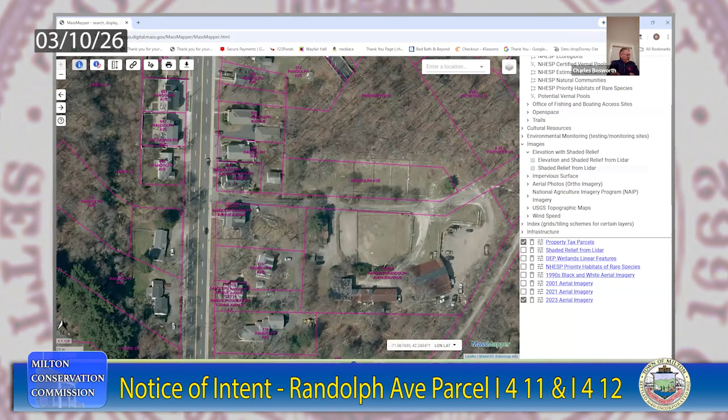I think that elevation change down at Randolph Ave is down around 114, 115. And the driveway entrance is at 136 at the proposed home. So you have a significant elevation change. You are correct, it does pitch down to Randolph Ave, as does that entire parcel of property on that hill.

Cognizant of that and the questions and feedback we got at the last meeting, what we're trying to control is any new runoff coming down from the site development down that road to avoid that situation, and just trying to mitigate and control it on site.

I guess if you look particularly at the house site, you could say we're not working on the right of way, and it's true, you're not doing much work on the right of way, so I agree with you. You're minimizing the runoff from the building site. On the other hand, I think there might be an issue existing. Just wondering about that.

I won't say it's the greatest current condition, but maybe that's a conversation to be had with inspectional services, that would be under their purview. It's the private owners who own it though, right? There's several private owners who own it.

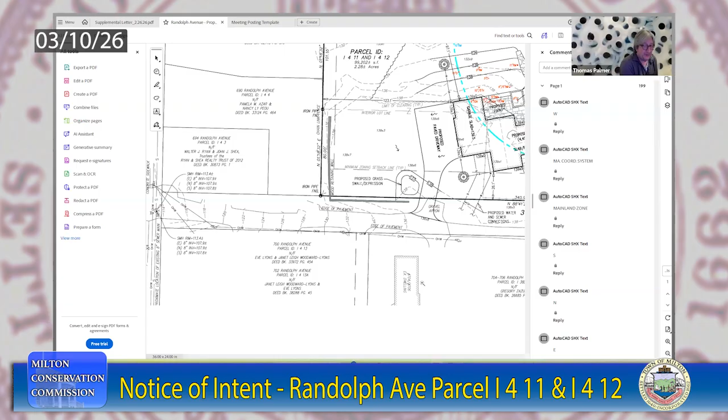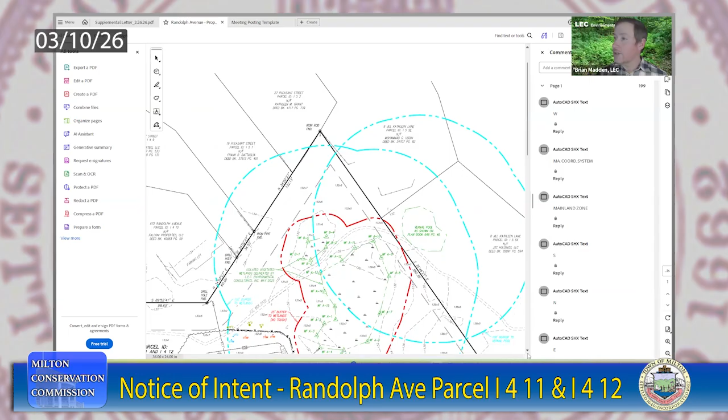I don't really have another question about the wetlands, except as far as this path you're talking about, is there any fill that makes this path happen? Did somebody make a path by heaving up dirt, or does it just naturally separate two parts of the wetlands? Hard to tell, we'd have to go back quite a while to figure out. With the amount of quarry out here that we talked about at the first meeting, and rock, some of it's natural, but a lot of it has been placed at some time in the past. There could have been old roads through this area. What's out there right now has been there for a long, long period of time.

The homeowner, to my knowledge, doesn't have any need or use of that path, so we'd be willing to take steps to abandon it in place. You can see this development footprint nibbles into it, so it would be effectively cut off as a cut-through path. But if the commission would like some measures to help close that off, we can certainly do it at the two trailheads.

I don't really have any opinion on that. I just had an academic question about how it got there.

Hey, can I take you back for a minute? Can you go back to the one that shows the driveway entrance? Because one of the things you said, well, let me back up.

In February, I was concerned that the Randolph Avenue drain has sufficient capacity to accept additional water coming from this site. The reason for my concern was because we approved a change order for the project across the street at 711 Randolph Avenue, where they tied into that, and so they were increasing the volume of water coming off of that site and going into the town drain.

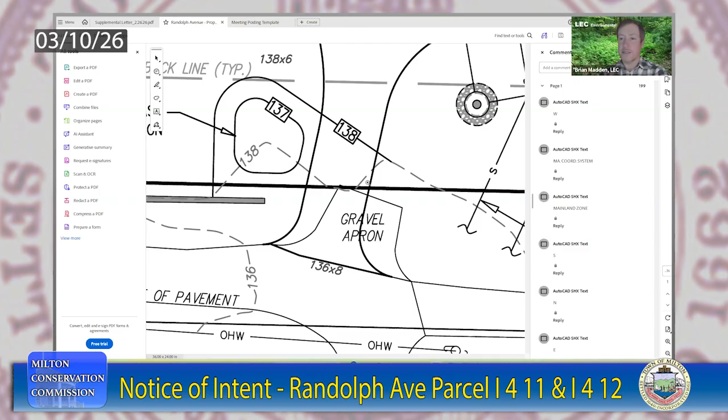I would just add that I'm liking this blow up, it really makes it possible for us to see this well. And it does occur to me there is new paving in the right of way that's not there now, so there's a certain amount of addition of new impervious to the right of way. And I would like that all tilted back toward this depression or rain garden we're talking about. I don't know if that's possible to do. Charlie was saying, no, we're stuck with the existing elevations. If that's the case, then it's hard to argue with the fact that the project will add a small amount, but a certain amount of impervious to the right of way.

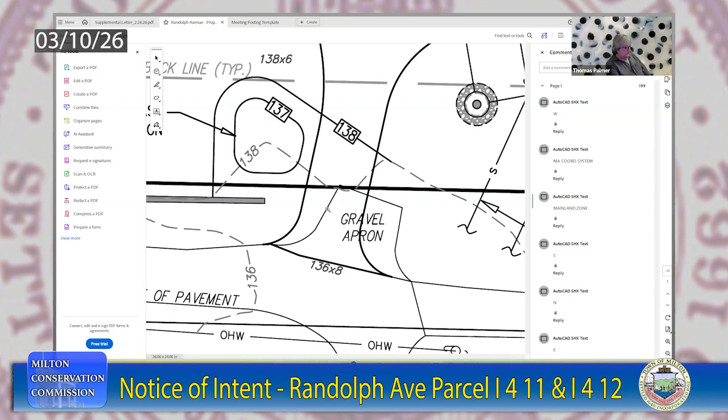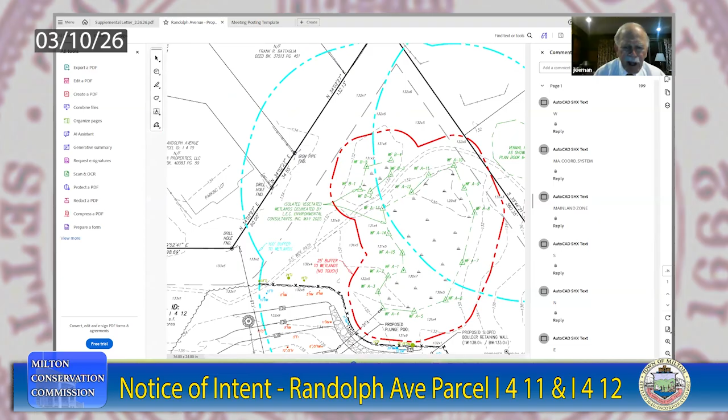Well, we've been talking about some pretty cost-effective alternative potentials here. So it's at least, in my view, doable. So I encourage you to think about that, discuss that further with the owner, and this might be a very simple solution. Yeah, no, certainly appreciate the feedback, and we'll review it in more detail and talk it through with the owner, see what else can be incorporated there.

Really appreciate it. And a beautiful solution too. Don't forget that, John. You are a rain garden enthusiast. I love them. I know you do. I know you do. I want to see it on the plan.

Makes me so happy. Are there other commissioners with comments or questions? Any? I don't see any, and I don't hear any. Are there abutters or members of the public that have a question or would like to make a comment?

Again, I don't hear any objections. And apropos of Tom's suggestion that we do a site visit, which I support, by the way, I also would like to have a site visit. It's a pretty sensitive area. We've got a certified vernal pool in the area, so I appreciate the applicant's sensitivity to that. I think they've addressed that on the plans.

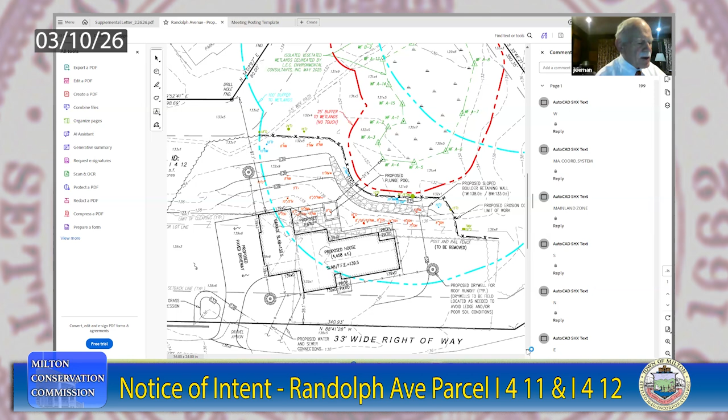But is it possible for the commission to meet on a Saturday morning at 8:30 in the next 2 weeks? I'm looking at Saturdays and I see the 14th, which is this Saturday. But for the public, we need 48 hours of notice before we have a public meeting. And for the applicant's benefit, this is a public meeting and we can vote at it, so this is not interposed for delay in any sense. We've got the 14th, the 21st, and the 28th. Let me just put it out to the commission. Can anybody do it this Saturday on the 14th?

Could I, sorry Mr. Chairman, before you poll the commission, I'm just... I know today put a pretty good dent in the snow melt. I don't know the current conditions out there right now. I certainly don't want to duplicate a site visit. I mean, how are conditions looking out in town with the snow?

Well, a lot better as of today. But you make a good point. We had a site visit for a pedestrian bridge under review, and we were supposed to meet Friday the 6th, and we canceled it. So our rain date, if that's the right word, is the 28th. Actually the 27th, we're meeting on a Friday for that site. But for that exact reason, we didn't want any snow.

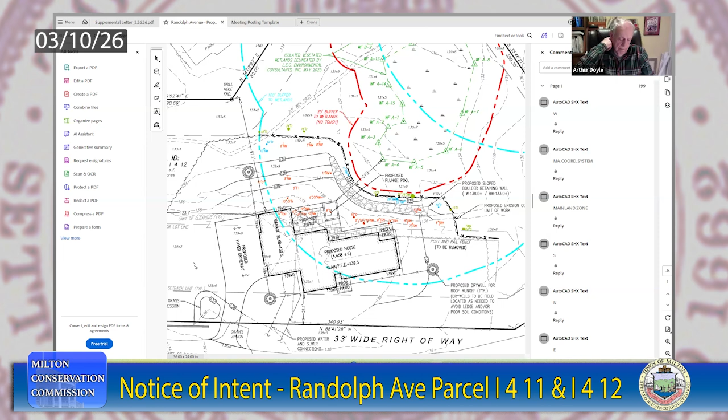Yeah, that works for us. Okay, commission members, so we're okay, is there consensus there on the 28th? Yes, works for me. All right, so we'll continue this with the assent of the applicant to the 28th at 8:30 on site.

Is there enough room if we go up the access road, can we park there, or should we go up the other access road? No, there's plenty of parking. Once you go up the right of way, you'll just go a little bit further down, and there's more parking areas right next to the paddock.

Okay, all right, so that's on for the 28th, and that's a public meeting. Philip, if you can just make sure that we get the publication out, and that way we can take a vote on that day. No problem, I'll take care of it. All right, perfect, good news. Anything else on this one, or can we move on?

Is this the same road that goes up to where the old jump is? No, it's not. It's right next to it, but it's not the same road. Yeah, right after it, going north, back to St. Elizabeth's. Oh, okay, all right. It's not a road with a street sign or anything, it looks like a driveway.

Okay, so what's my landmark, what's the best landmark? There's a sign at the bottom that says Pleasant Street, indicating Pleasant Street's coming up. If you turn right there, a yellow sign, that's the road. Okay, yeah, it's in between 702 and 690... 694. Yeah. Yep.

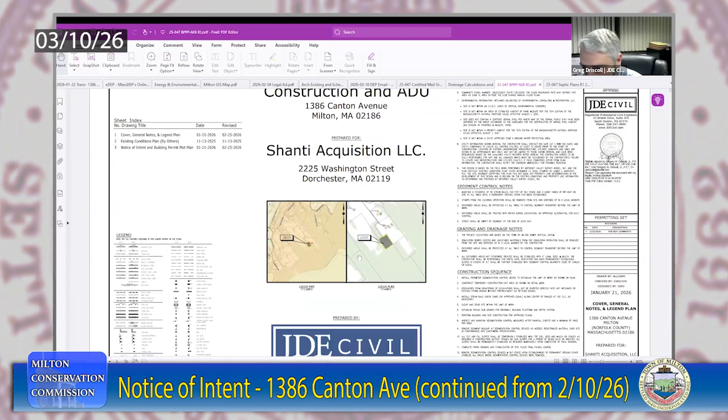So the project applicant, Solomon Chowdhury of Shanti Acquisition LLC, is looking to obtain the land permits to build a new home on their property at 1386 Canton Avenue. Just to start off real quick, I'll get us oriented here with the location. So here's Canton Avenue right here. This is that long right of way that comes down with several houses off of it to the property towards the back. I have another.

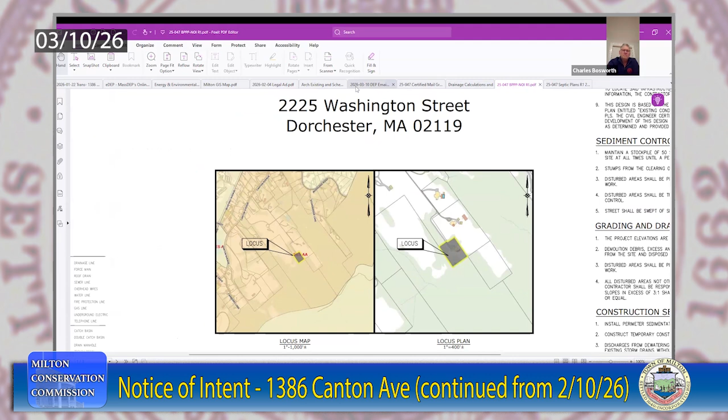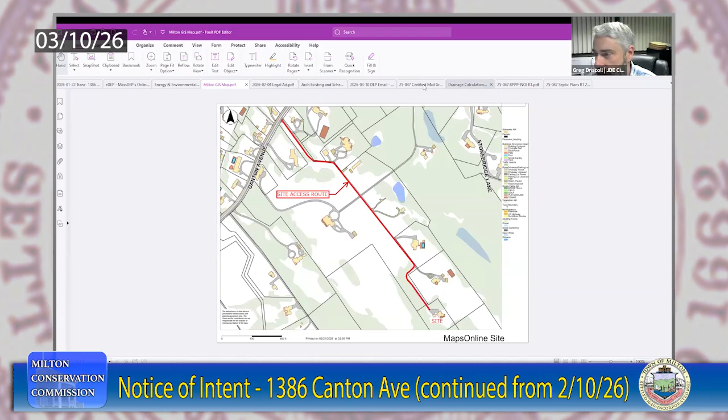You come in right next to the Suffolk Resolves House? Yeah, I think so. Yes, and here's a quick little sketch I did. It's the last property at the end, right? You kind of bump right into it. Yes, absolutely, that's it. All right.

I'll get into this - this is the existing conditions plan right here showing the right of way coming out to the property. This is the existing house on the property, currently a two-story home. Not sure how many bedrooms off the top of my head, but I'll discuss that when we talk about the proposed. This existing garage is going to come off, and the house is going to become an ADU. So this existing house is shown to be demolished, a new house to be built in this location, and the existing house will be converted to an ADU.

So the applicant would like to - and as we have a flagged wetland, Bordering Vegetated Wetland, on the edge of the property to the west - we're within the buffer zones to the BVW. So we're before you tonight for a notice of intent application for the construction of this property, for this house.

And this is going to be a proposed 4-bedroom single-family home. The existing dwelling will be converted to an ADU. We are proposing to reutilize the existing water well here. We're building a new septic system to accommodate both structures towards the back of the property. The septic leach field itself is outside the 100-foot buffer; the tanks, however, are within it.

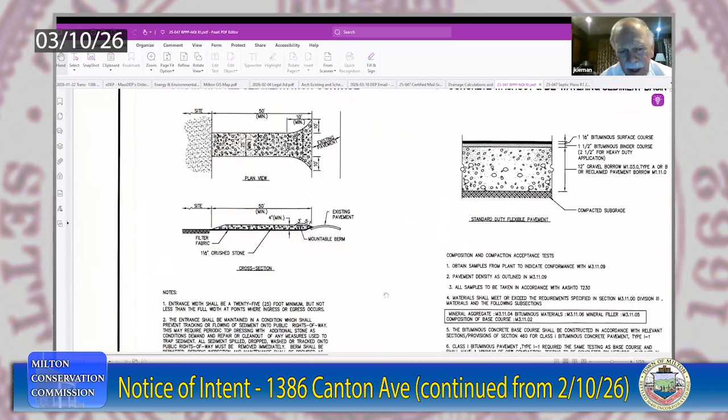I don't remember this, but what you just said about the stabilized construction entrance, what is that? Just a 3-inch gravel or 2-inch gravel, or something? Right, the reason I bring it up, we just had a meeting last week on another large site project, and the construction trucks will go in and out right onto a fairly heavily trafficked roadway. So it made a difference.

But one of the issues that came up was, and I'm not suggesting that there's any knotweed in this area, but we do take a pretty good look to see if there's any invasive species around, and I'm talking about knotweed right now. We just wanted to make sure that construction entrance and the stabilized entrance for the trucks is sufficient, that if there is mud in the trucks, whether they're concrete or road graders or whatever you're using, that they're cleaned, and that the importance of that goes up to us. If there's an invasive species, we don't want the trucks tracking that around. So I'm just asking you about what's the size and configuration of that stabilized truck entrance.

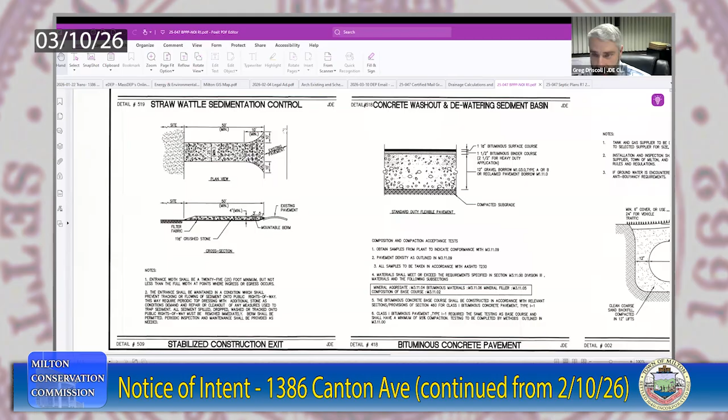But I'm just curious as to whether or not you've got, because on the other site they do have an invasive species, Japanese knotweed problem, and we just wanted to make sure the truck cleaning works. Yeah, I did the test pits on the site with the Board of Health, and I didn't notice any knotweed when I was out there. I think there was some. We were on what, 1362 or 1365. I thought there was some Japanese knotweed right by the corner of the house. So we've been up in the area, not at 1386, but we were at, I forget whether it's 1362 or 1365, and there was some knotweed around there.

All right, and another thing I wanted to mention is the septic plans are at the Board of Health. They had comments, we just addressed those and submitted back to them. They're under review right now. And we have this same note on that plan to make sure that the septic contractor knows that the work is within jurisdiction of conservation, and make sure that they have a copy of it and they know what to do of the order conditions once that's issued.

Yeah, that's pretty helpful to us because it depends on who the contractor is, but it does help us if they're informed and given notice that they have to be careful.

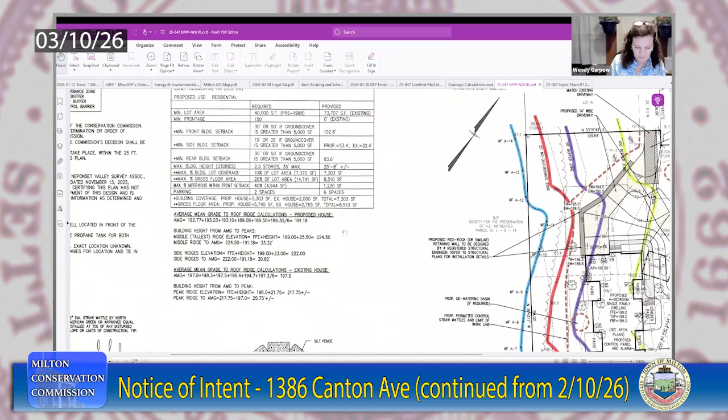So the proposed house is 5,745 square feet. The existing house is 2,765, for a total of 8,510 square feet. Could you repeat those numbers? Sure, they're right here on the screen. Proposed house, 5,745 square feet. The existing house, 2,765, for a total of 8,510 square feet between the two.

Can you explain to me how the existing house square footage meets the standards for square footage of an ADU, and building coverage?

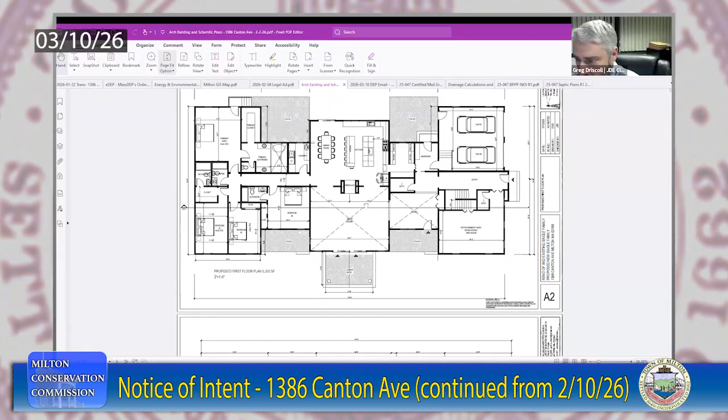Yeah, that's more for the architect. He did send me the plans though. They have common areas within the existing house setting, the areas that we covered to common areas that won't be included as residential areas. So they're calling this main house space, like common area for the main house. And then the gray shading is the ADU. So they're using portions of the house for a gym and an office as related to the main house, which is the new house.

What's the ADU limit, Wendy? Is it like 900 feet? It's pretty small, yeah, I believe it's under 1,000 square feet. Yeah, I just don't see how this meets that criteria. Yeah, it's 900 square feet.

And frankly, I'm the engineer, that's for the architect and the building department to work out as well. But this is how they've approached it. And I believe these are two separate conversations, two separate houses, correct? Yep, two separate structures. But you're claiming that more than half of the existing structure is going to be considered common space? Yeah, or main house space is what he's calling it on this plan.

Has this been before the planning board? No.

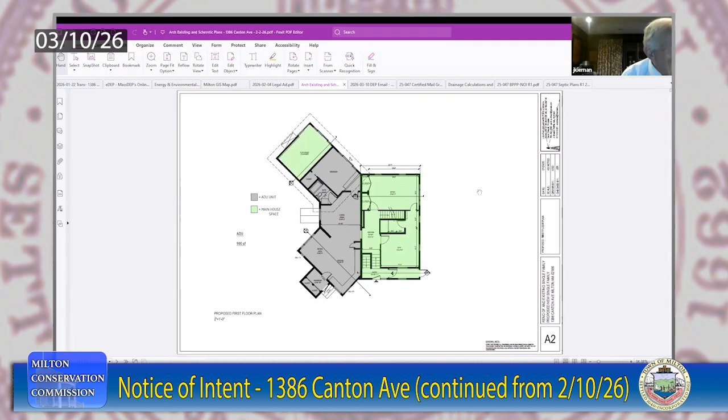Well, that's a big house. And I confess, I haven't looked at the runoff calcs. That's a lot of impervious space. Do you have calculations as to roof runoff and where it's going? It shouldn't be an issue, but all you have to do is add Cultec chambers if you've got too much water. Yeah, I didn't see where this is a single family home, and even if they would still consider single family under for stormwater, I didn't see any.

So for the state, we're exempt from stormwater, and that's where I would have filled out the NOI form. And I didn't see anything in the local regulations requiring us to do anything for stormwater or roof drains.

Well, we're interested in the runoff. Where's the water go? It's usually not a big deal as long as you've got some mechanism to. Okay, but is there a local regulation that requires that? Because I didn't see anything in my review of the bylaws. Well, not specifically designated as a stormwater reg, but just our overall review of where's the water go?

I mean, we're just still using net increase flows across the property into the wetland. West to east? Yes, I'm sorry, east to west. That's certainly within the purview of our bylaw. I mean, if you're putting more water into the wetlands, we want to know how much and what's the flow rate. That doesn't have to be a specific component of the town bylaw, but rather the impact. What impact does the alteration have upon the resource area that we protect?

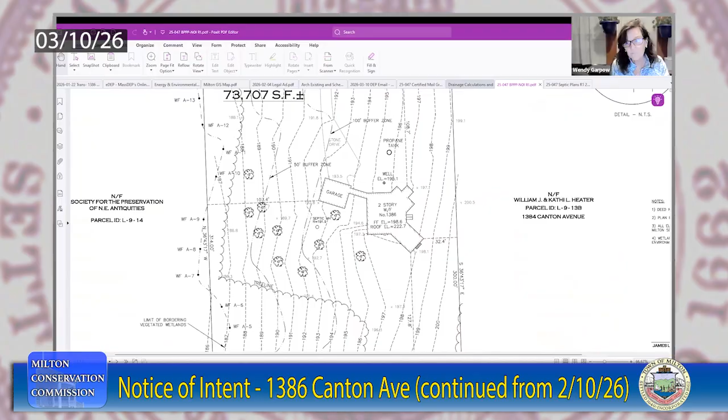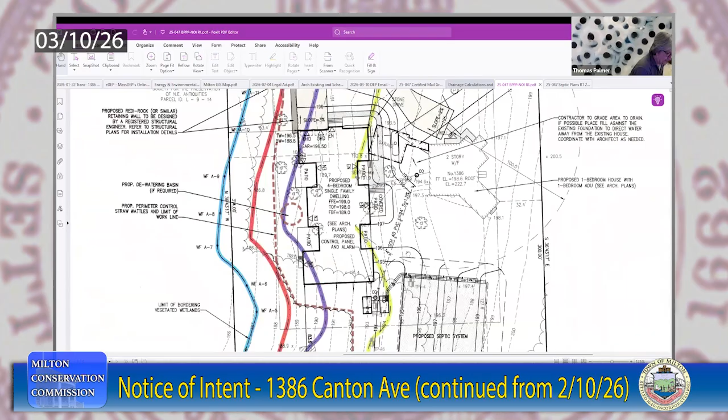Go ahead, Tom. I'm looking at the existing condition plan, and I notice it shows a tree line, and then a group of individual trees between that line and the existing house, maybe about a dozen. Then as I go to the other plan, it seems like they're all still there, but some are covered by the house. Those are supposed to be screened back so you see the existing condition and the proposed overlaid on top, with darker outlines. So there's some trees that will obviously be lost to the house, but there are others between the construction as drawn and the wetland, generally in the buffer. My question is, what are those trees, and are you keeping them or not?

That's a good question. Like this one right here, we could keep - that looks pretty wide open. I don't know which one you mean. This one right here. Do you know what that is? What kind of tree? I don't know off the top of my head, but I assume they're sort of semi-big because they get their own little symbol.

Well, I guess we can ask again at the site visit, but from our point of view, the more trees in the buffer zone the better. Yeah, we tried to keep as much as we could for this area where we're kind of pulling back to get this corner of the house in and the upgraded septic system in.

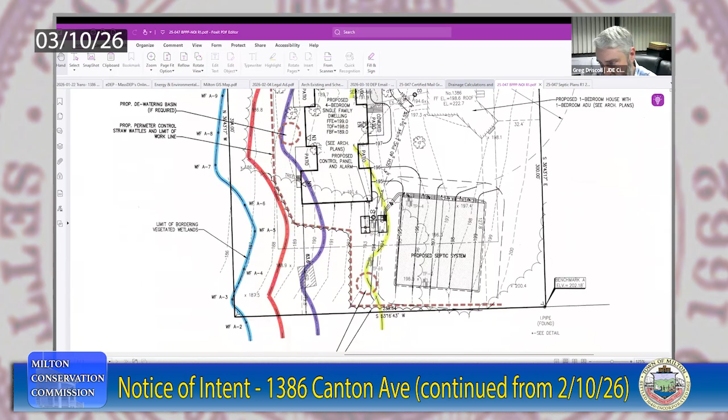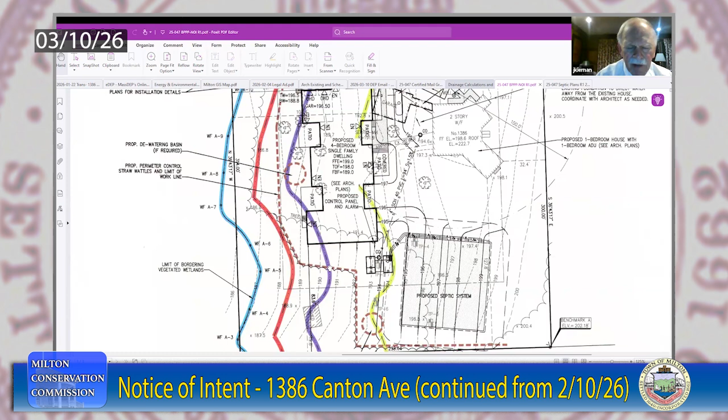We do have a tree replacement policy, so we'd need a tree survey as to what's coming down, because it has to be replaced in kind. We used to have a 3-to-1 replacement, but the last 10 years we've had a matching either DBH or circumference at breast height - so if you take out 100 circumference inches, you have to replace 100 inches. If you can do it on site, we encourage that, and this is a large site, so you probably can. But if you can't, we have an inventory where you can either put the trees in inventory or pay - we're now at $700 per tree, measured at I think 3 inches caliper for $700. So we need a tree survey to know what's coming down and what the replacement plan would be.

But only within the 100-foot buffer, right, John? Yes, that's correct. All right, any other questions from commissioners?

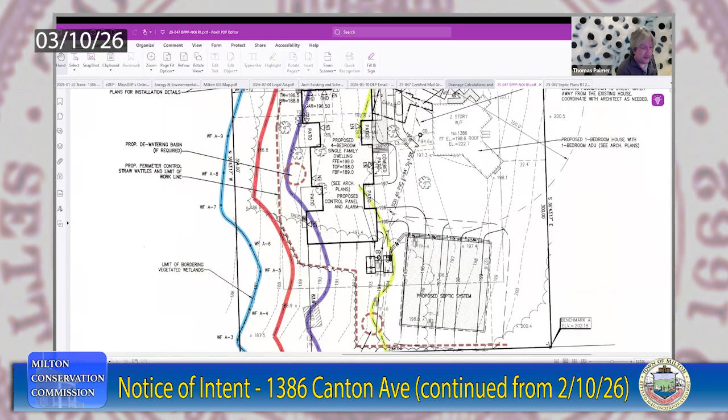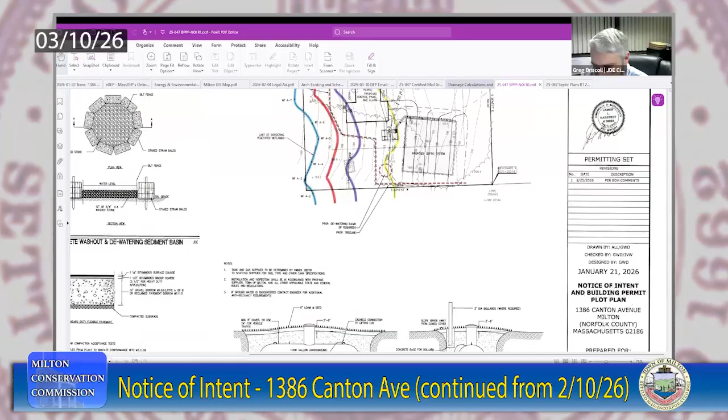Why is the propane tank being buried - just for aesthetic reasons? Yeah, it's going to be located right here between the two structures, and it's a larger tank because it's a pretty large house, like you said. It's probably going to be required.

Is that backup or a primary heat source? I believe it's primary heat source. That's a question I could ask the architect - if this is for cooking or heat, or if they're going to do oil for heat - and I'll ask that question.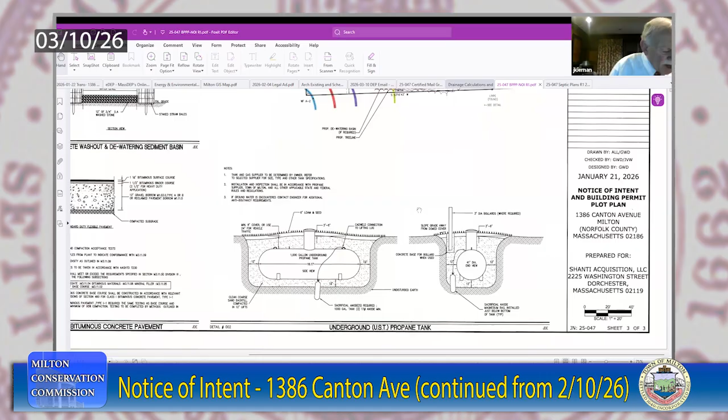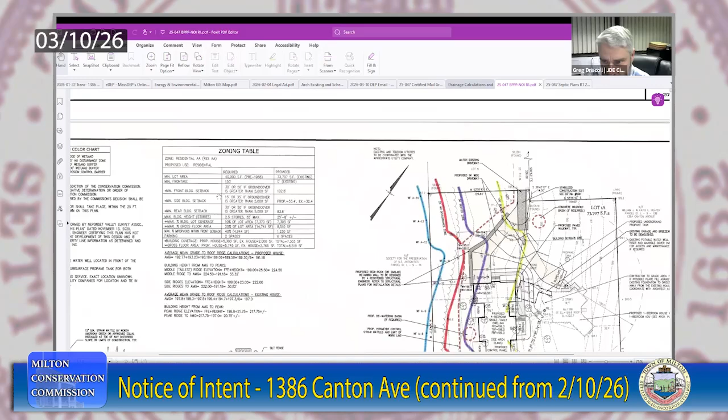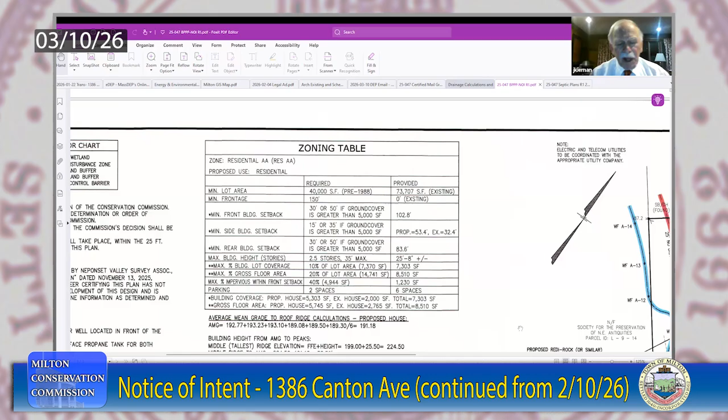If I read right by it, but just given the size of the property and the size of the house - is there a swimming pool here? I didn't see it, but is there any kind of pool? No swimming pool. We got the zoning table over here - the size of the property is 73,707 square feet, and the lot coverage, gross floor area. I just didn't want to miss it, didn't see a pool because we do have concerns - easy concerns, but we want to make sure there's no discharge of chlorinated water into the wetlands. It's an easy fix, a closed system, but that's just our regular and customary approach to pool proposals. I didn't see it, I didn't want to miss it. Okay, thanks.

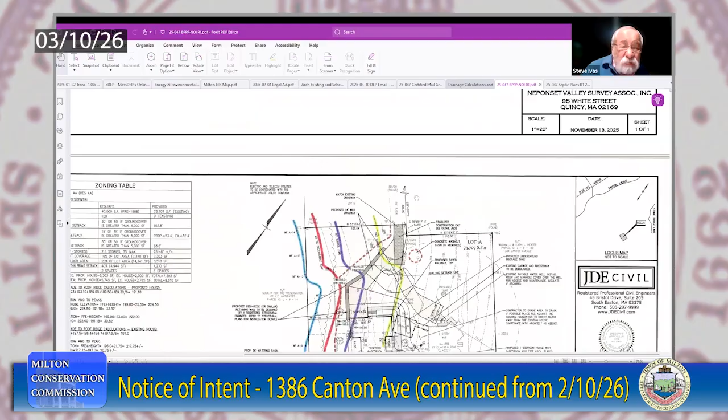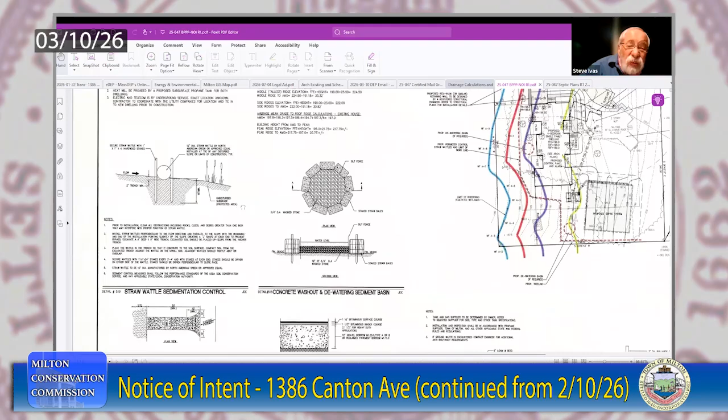John, this is Steve. I'd like to see 4 to 6 inch stone on the construction entrance. Seems to work very well. Greg, do you have a problem with that? Nope, good. So would you say 4 to 6 inch stone? Yes, please.

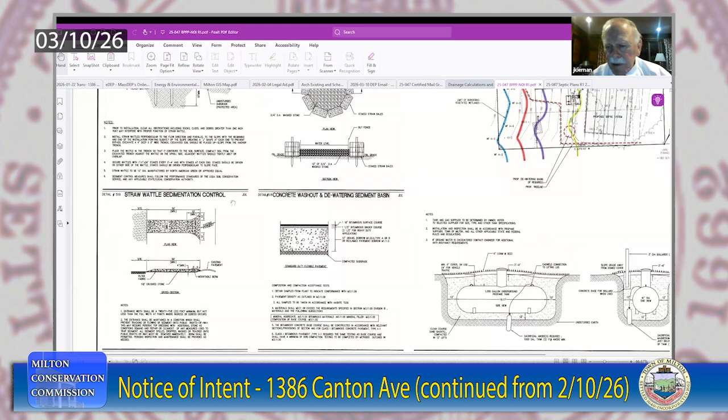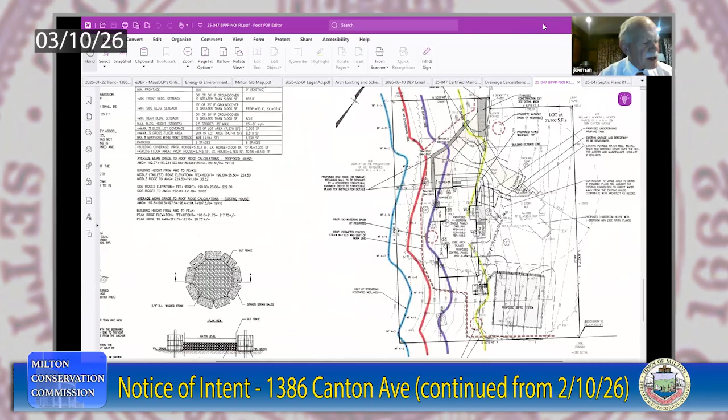Anything else, commissioners? Abutters, members of the public, please speak. I don't see everybody on the screen, and I don't hear any voices. If there's no other comment, with the assent of the applicant, we will continue this until March 28th at about 9:15 on site. Is everybody good with that? Sounds good. All right, perfect. Thank you very much, all. I appreciate it.

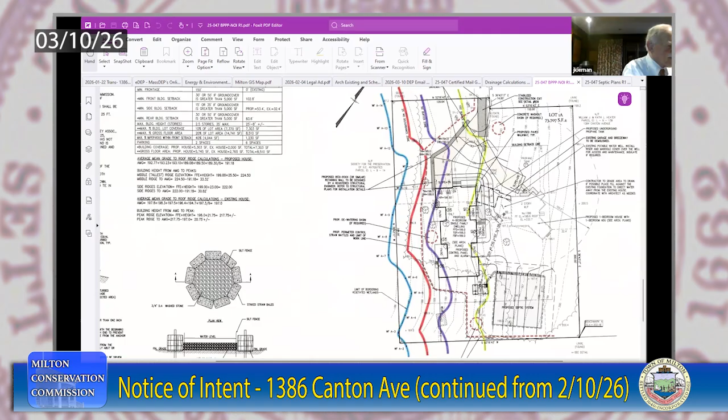Are we good? So we go on now to number 3, alterations to wetlands at 45 Riverside Avenue. This is continued from February. Is there anybody here on that? I can't see.

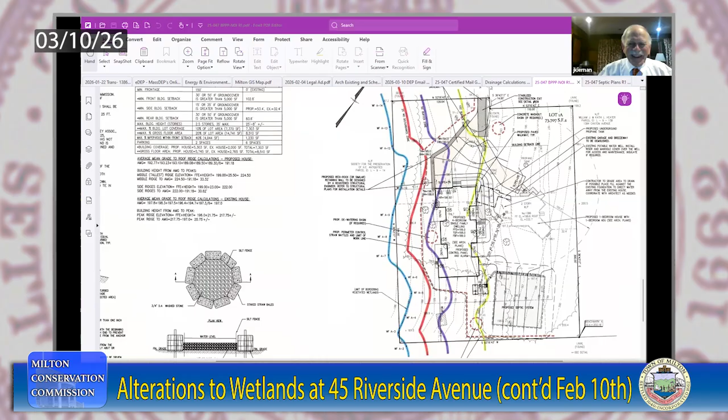Steve, are you able to take that screen sharing down so we can see everybody in attendance? Let's see, let's find out. Uh-oh, they left. Greg, help us. It appears that I cannot take it down easily. Greg, are you still here? It looks like it, I am. I'll leave, I'm trying to find the controls here where I can shut it off, but I'll leave the meeting. That should do it. Will it? I hope so. Hey, there we go. All right, thank you all. Perfect, that works. All right, good.

So we're on to the next one, 45 Riverside Avenue. This was on a couple of times, January, February. Mr. Nguyen, you're with us. Good evening, how are you? Good, good, thanks for joining us.

We had invited you a couple of times in the past to attend because we had two concerns. One is that you did some house construction within our jurisdiction, and second, there seems to be some cutting of the brush in the resource area, which is the marsh across the street. We wanted to give you a chance to come in and explain. When we didn't hear from you, we issued an enforcement order that's now been recorded with the Norfolk County Registry of Deeds. At the last meeting, we imposed a fine of $300 and asked you to come in again to show cause why that should not be an ongoing fine. So can you tell us what you did to the house and how you did it without our permit?

Actually, it's my cousin. Yes, he doesn't speak English, and he just came from the country, so he doesn't know the situation and the law here. The house was built with the permit already, and they moved on very smoothly, except a couple issues from the front house. He cut the tree across the street, which he didn't know was a problem. He told me the tree was dead and he didn't want it falling down on the street. That's why we cut it, and he's willing to pay the fee, whatever it takes to make that happen. Like I said, he doesn't understand, he just came from the country, so he didn't know that. So he said he would like to pay for the fine.

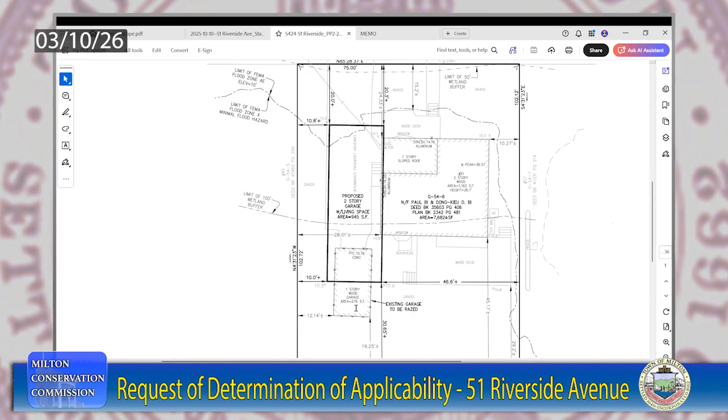So is the addition proposed for in that darker line, right? Yeah, within that footprint, this dark bold line here. So you're removing some impervious roof line where the one-story wood garage is being torn down. Right, so you're decreasing that footprint, but you're increasing the footprint as you're looking down the driveway on the right-hand side - it looks like there was some green area there.

Yeah, I know as of now it's just wide open. There might be some green on the side, but from my understanding it's out of the way, or from my recollection. I don't know what you mean by out of the way. No, I thought you were just commenting about the green - I thought you were talking about that. But yeah, so the addition itself is this in bold there.

Now what we're trying to determine, Kyle, is how much green area we're taking up with the new roof line - that's what we're trying to determine. And it appears that if you were pulling in the driveway on the left-hand side, it looks like there's a light gray line that's asphalt, and it looks like there must be some sort of grass strip on the left-hand side. And then you come in, your stairway's on the left, and then you come to the old garage.

But you're removing a large portion, or half the roof, of the old garage. So is behind the garage going to be created as pervious material where it actually says one-story wood garage? Once that comes down, what is going to be the condition of that location? Is that going to be green area? Is it going to be gravel? What is it going to be? I believe it's going to be gravel, I don't think it's going to be green area. Well, either gravel or green area is going to be pervious. I would think, John, we would want to know what that condition is going to be left in.

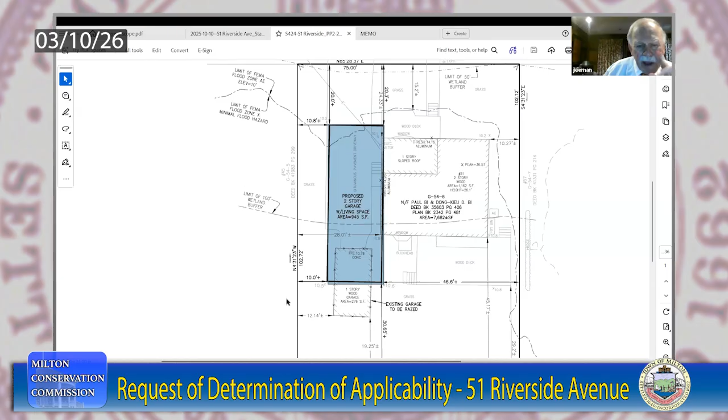Well, again, Charlie, you correctly identified the issue. There's a plus and a minus to this. I just don't know if that blue area we're looking at, which will be the building, is bigger than the existing driveway. It appears to be, but I'm only basing that on the width of the existing garage, thinking the driveway is the same width as the garage.

Well, John, not to interrupt, but I do see a light gray line on the plan, on the left-hand side, that's actually outside the proposed building that appears to be the edge of the driveway. But I would agree with your earlier comment—this should probably be staked out in the field.

And I think we should know what the completed design will be at the back of the building where it says one-story wood. We want to make sure that doesn't become impervious. Okay.

Again, we're not trying to slow you down, but I'd like to take a look at it. We can do it on the 28th of this month, just stop by there—probably around 10:30, maybe 10:15. Let's say 10:30 to be safe. But if you could stake that out for us, it would certainly help me.

And it's a public meeting, so we're not going to slow you—we can vote right there. But I'm wondering if it would help at all if I had a photo of the existing driveway. Well, I guess if you want to meet on the 28th, but maybe that would answer a question. Well, you're all familiar with the area, right?

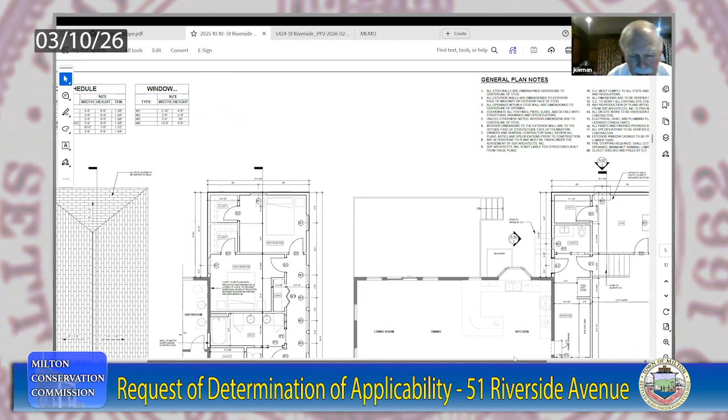No, I understand. But one of the things that Tom brings up is that you're really not supposed to build in the floodplain, so you're going to have to tell us how you're going to mitigate that or address that regulatory issue. But the architect can do that. Right, right. Okay, okay, just jotting some notes down.

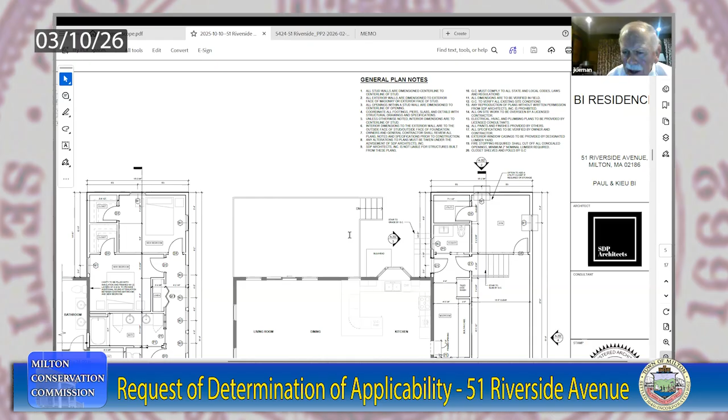Where were we? Oh, I know - Myers Lane, remember? We had somebody building a part of their house that was in the floodplain. And the answer was they put it on stilts. The house was actually on Troutbrook Lane, but it backed up to Myers Lane, and it was an easy fix.

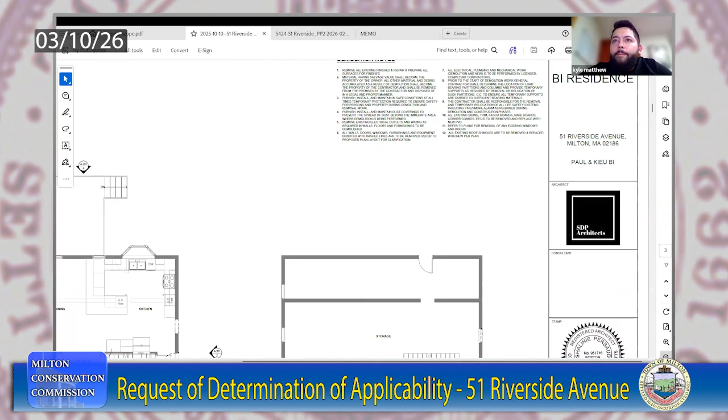It may be, John, maybe. But what I'm saying is we're not trying to make this difficult for the homeowner - we're trying to help them comply with the law. For inland floodplains, if you fill in the floodplain, you generally have to dig out an equivalent volume. But on the coastal plain, it's different because the ocean is just one big body of water, and you're not really confining it by filling at the edge.

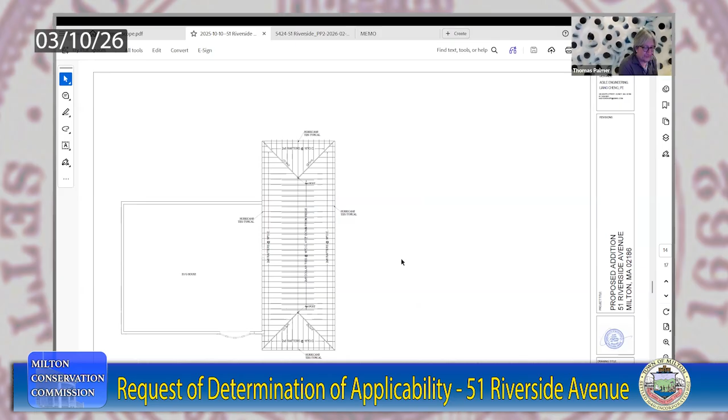So I don't think compensatory storage is required in the coastal floodplain. Is that your understanding, Steve? Steve's on mute. Yes, for the moment, Tom, but the regs will be changing, so we don't know what they're going to say afterwards. If this was my project and my house, I don't know - I would question whether I wanted to invest in a structure here unless I raised it somewhat, simply because we all know this is very flood prone, and it's going to get more so, as Arthur said.

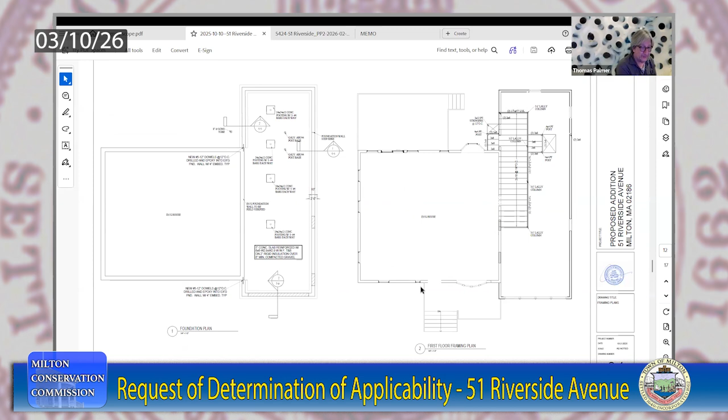And the category is called land subject to coastal storm flowage. Yes, that's what it's called. Performance standards? Right. Not yet, anyway. I'm not really aware of any. Are we 100% sure we're in the flood zone? Yeah, part of it.

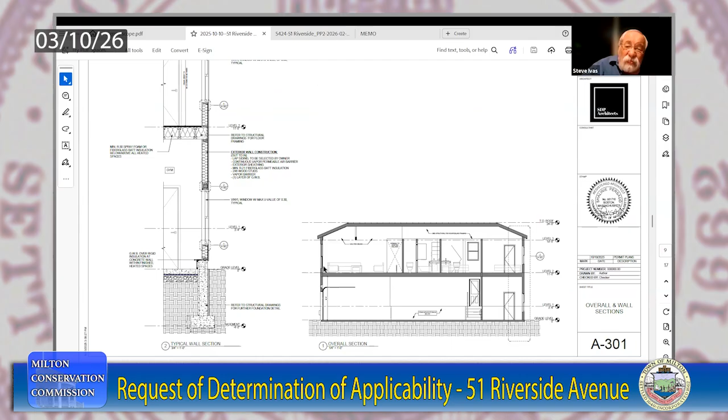And that came up at our meeting this past week, Steve, with NEPRA - we're looking for a state grant to work on those wetlands to prevent the flooding in this very area, Riverside. Yes, and we're doing whatever we can to help them. But as I said, there may be an easy fix to that, and as Tom just said, it might be that you put it on stilts.

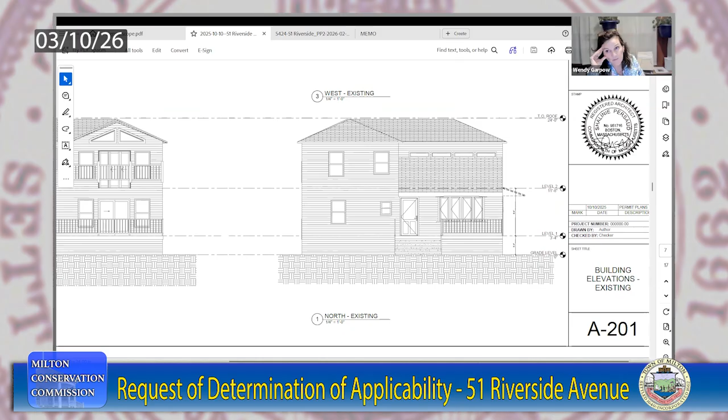Mr. Matthew, another thing to consider with your clients might be to move the addition back towards the rear of the lot, getting it out of the AE zone. It doesn't look like they'd have to move it very far, but that will save them a tremendous amount in annual insurance premiums. Oh, okay, thank you for the suggestion - I'll definitely pass it along to them. Yeah, but a scary amount, I'm guessing.

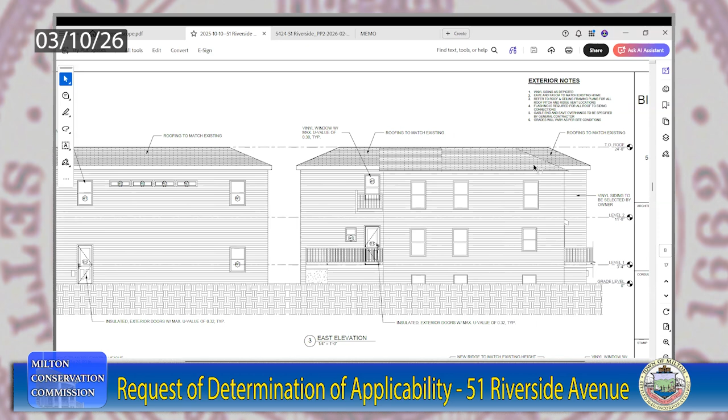I'm just trying to see if there's anything I can find on the roof because I know there's a note here that says refer to roof and ceiling framing plans for all roof pitch and ridge vent locations, so I'm just trying to find that. And Kyle, most of this is done by the computer program itself, so I don't think it's complicated for the architect to just add that data.

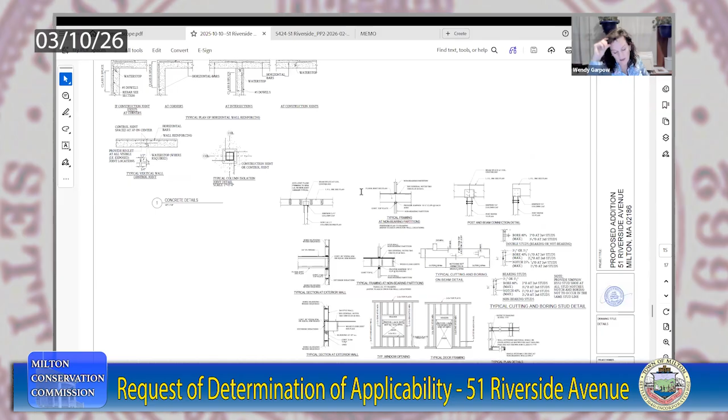If we're not in the flood zone, we move it back away from the flood zone. Yeah, and actually, Mr. Matthew, if they are amenable to moving the structure back, I would recommend moving it further than where the existing hazard line is, because that is going to be changing - even more. I guess I just don't know how far back he can go before hitting the setbacks or the minimum required. Well, I'm presuming you could go back to the back of the existing structure, unless it's grandfathered.

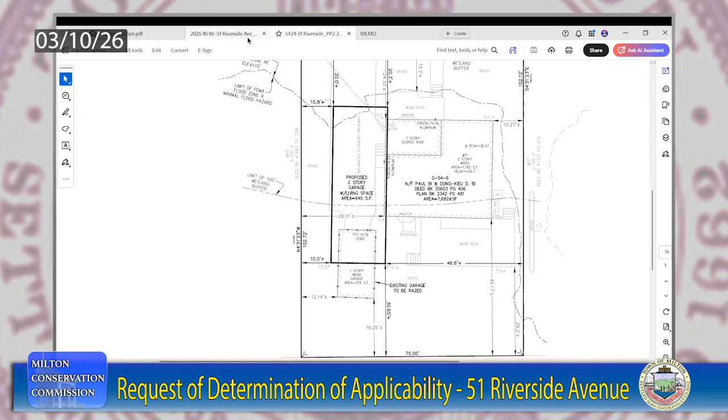You're correct, and I don't know what the setback is there. What do you propose? You're 19 with the existing garage. And what's the current planning board setback - 10 feet or 15? It depends on the zoning down there, John, and I don't know exactly what the zoning is. But it looks like you could slide it somewhat, and it appears to be a viable option for getting out of the floodplain or the coastal storm flowage area.

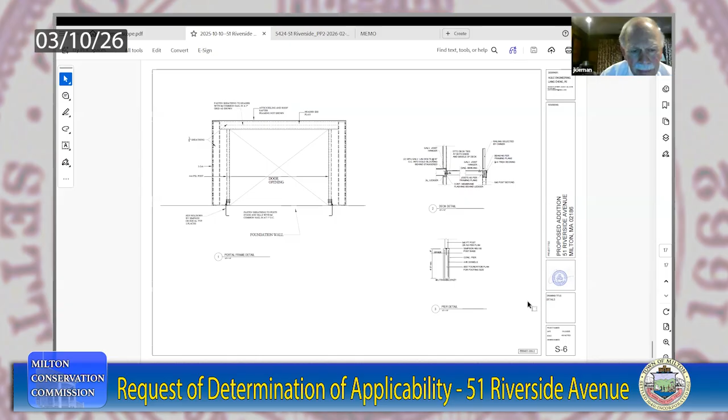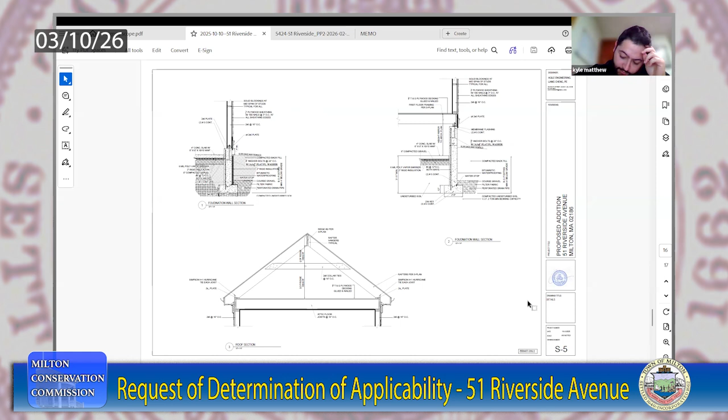So do you have a list of questions, Kyle, that you can get to the architect and get back to us? Yeah, so I basically have increase in impervious surface, and how is the floodplain going to be mitigated?

Those are the two you're looking for? I'm not sure you can mitigate the coastal flooding. I guess maybe you can, but I don't think so. But the alternative question is, can you move it? Can you just slide that? Stay out of it, get it out, then you don't have to mitigate it. Move the addition - I don't think that would be an issue at all.

So I guess it's a matter of how far back we can move it. It sounds like an easy fix. And a quick look at the planning board regs should give you the information you need.

When you move it back, Kyle, it's going to change the impervious data. So the architect's going to have to move the building first and then calculate the impervious data - the runoff on the roof, if it's increased with the proposed development versus the existing in situ condition. Okay, right. Yeah, the roof runoff, that's a big one.

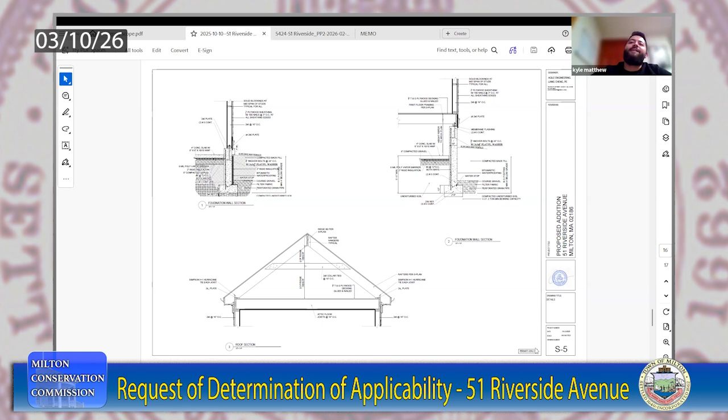Okay, let's get to the next item on the agenda, which is reviving the Norfolk County Conservation District. This is informational, and when we got the notice, I'd asked Arthur to jump on this and give us a presentation, because it looks like the old conservation districts have kind of fallen into disfavor or pulled a Rip Van Winkle on the state, and hopefully they're coming back. Arthur, can you get us up to date on this?